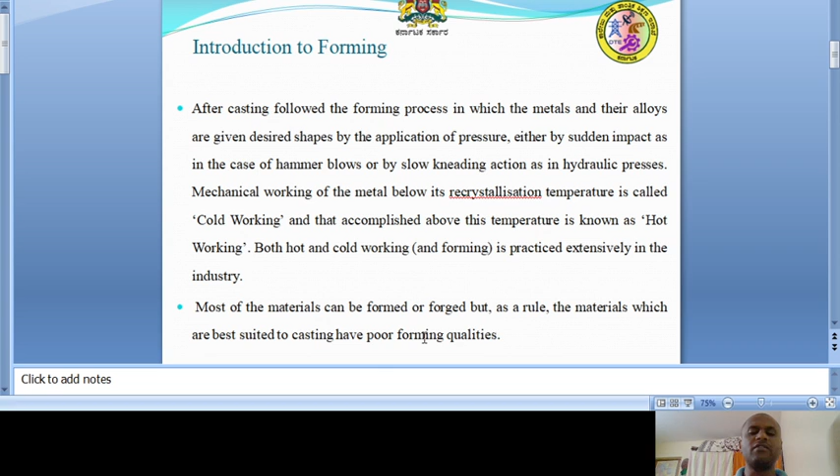Going to the next slide. In general, the materials best suited for forming are those which have a long mushy range during solidification, for example, solid solution alloys. For example, you are riding in a car. If you see the door of the car, or the top or side surface of a metro train's coaches, it is bent or curved. This curved shape is obtained by forming, where pressure is applied by hydraulic presses. The shape to be formed is kept at the bottom, and by pressing, the sheet obtains the shape of the product.

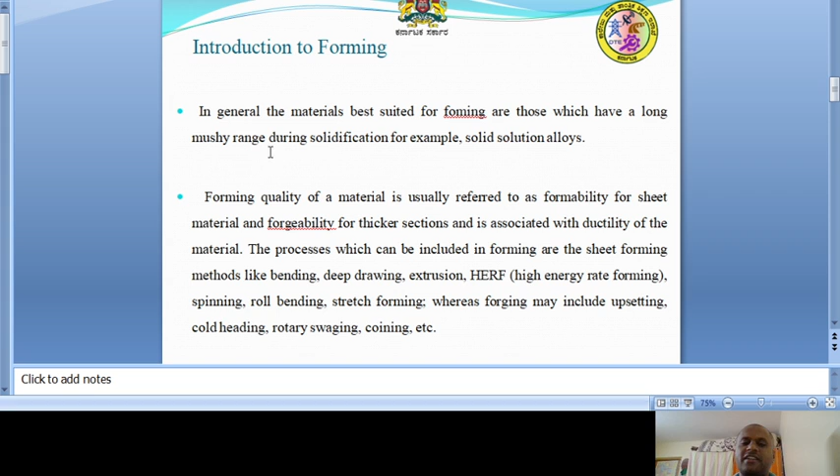This is one of the forming processes, and it is used widely: aircraft covers, aircraft outer shells, ISRO satellite outer bodies, trains, the automobile sector. These are some areas where forming is enormously utilized. As said earlier, the forming quality of a material is usually referred to as formability for sheet material and forgeability for thicker sections, and is associated with the ductility of the material. The property of getting elongated and drawn into thin sheets is called ductility.

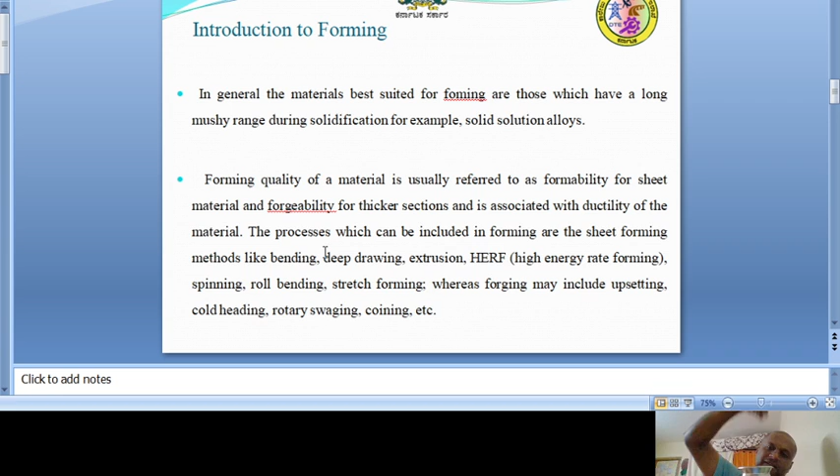The processes included in forming are sheet forming, like bending. In many materials we use, the sheet is bent, and depending upon the dimension we use that end product. Deep drawing: the press pushes the shape, and the bottom shape is obtained. This is called deep drawing. Glasses are some examples of deep drawing.

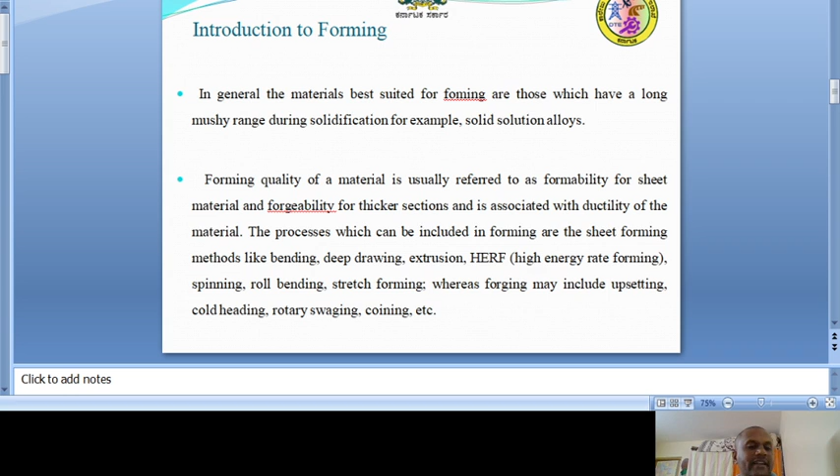Next, extrusion and high energy rate forming are also used. Spinning, roll bending, and stretch forming, where the sheet is stretched and pulled. Bending is used in satellites or curved bodies; this is roll bending. Whereas forging may include upsetting, cold heading, rotary swaging, coining, etc. Next, coming to forming, here you can see the picture.

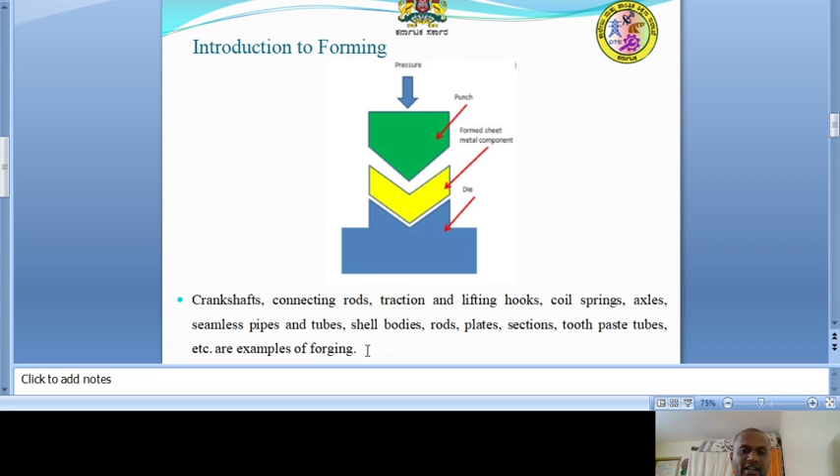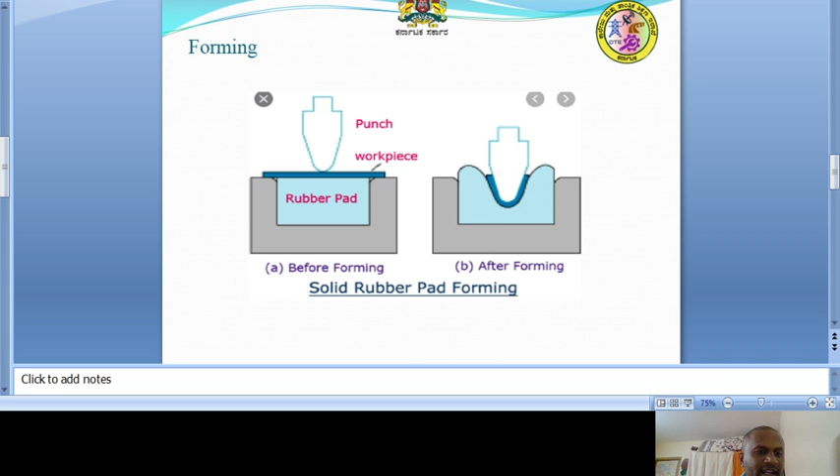Going to the next slide, let us discuss the advantages of forming.

The advantages of forming include no wastage of raw material. The material has to be cleanly planned thoroughly so that material is not wasted at all. How much ever we require as per the standard dimensional reference, we cut it, keep the material in the die, the punch is used, and force is applied.

By this, the shape is easily formed in the work material, and there is no wastage of the raw material. So if there is no wastage, cost can be minimized. Only as much as we use, that much money is spent.

Better mechanical properties of the product and faster production rate. By the punch continuously hitting, the material gets tightly packed, so the material gets very good strength. If you press it, it doesn't get easily squeezed. These are some mechanical properties of the product.

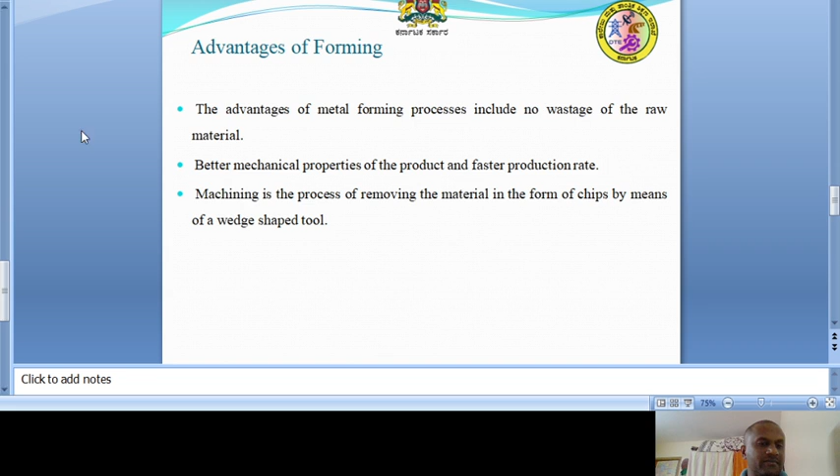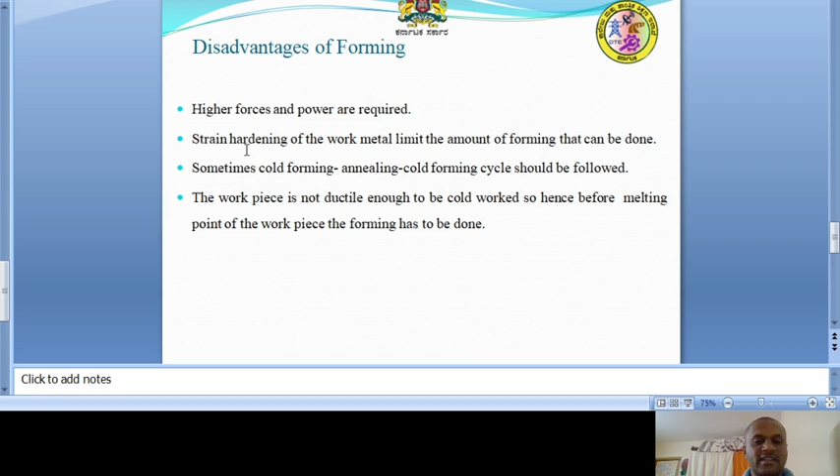Next, the workpiece is not ductile enough to be cold worked. Hence, before reaching the melting point of the workpiece, the forming has to be done. If the object cannot be formed just by applying pressure, it can also be done with the help of heating, strain hardening, or similar heating methods. If you heat the material, due to heat, before melting, we should not melt the material, but when you heat it the material gets softened.

When it gets softened, then pressure is applied through the punch, so the shape can be easily obtained. Heating is done like a flame, using a burner. The flame hits the surface so the surface becomes soft, and then pressure is applied through the punch so the shape can easily be obtained. This is an additional process used if forming is not done properly at the earlier stage. So these are some of the disadvantages.

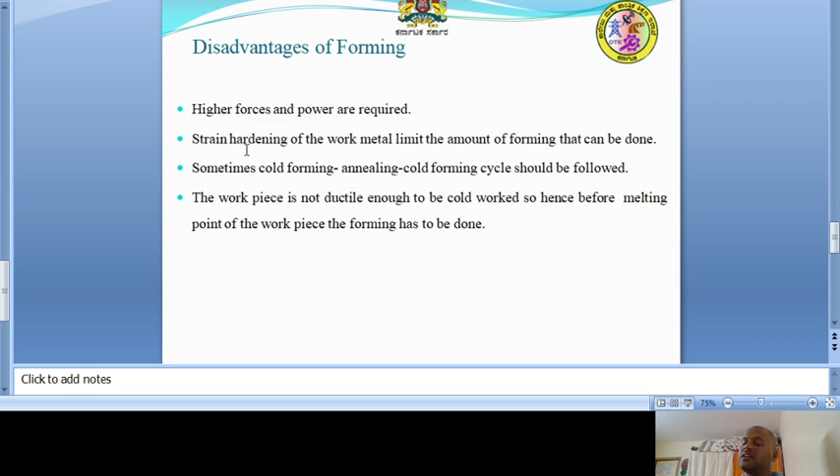Hence, before the melting point of the workpiece, the forming has to be done.